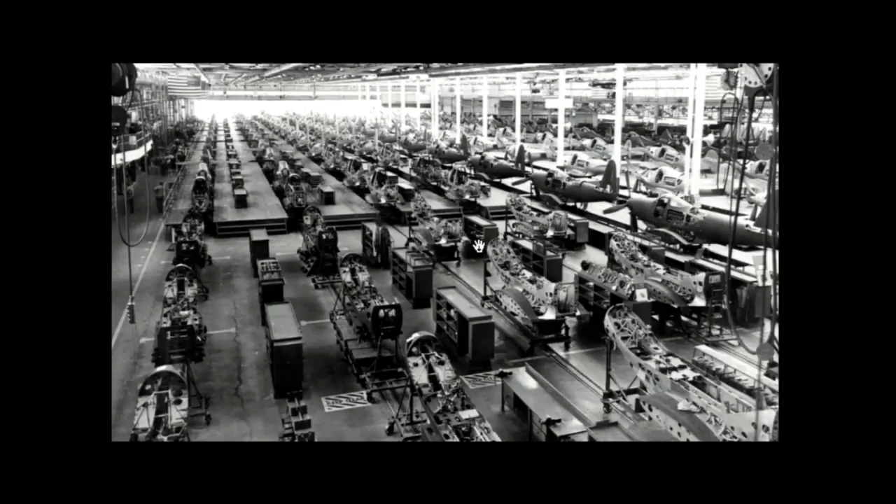I'm clearly behind on the slides. I feel like Britney Spears with this thing on.

So basically behind the scenes of these everyday abundances, the Coca-Colas that we enjoy - it's not Coca-Cola actually, it's something much more healthy - is this system, this industrial machine that created this extraordinary abundance and this idea of the good life.

And what's happening in our generation is that that's failing in a lot of different areas, but particularly within the domain of housing. The idea that you can put aside some money and afford a home is not working, even in very wealthy developed economies, and that's really, really interesting.

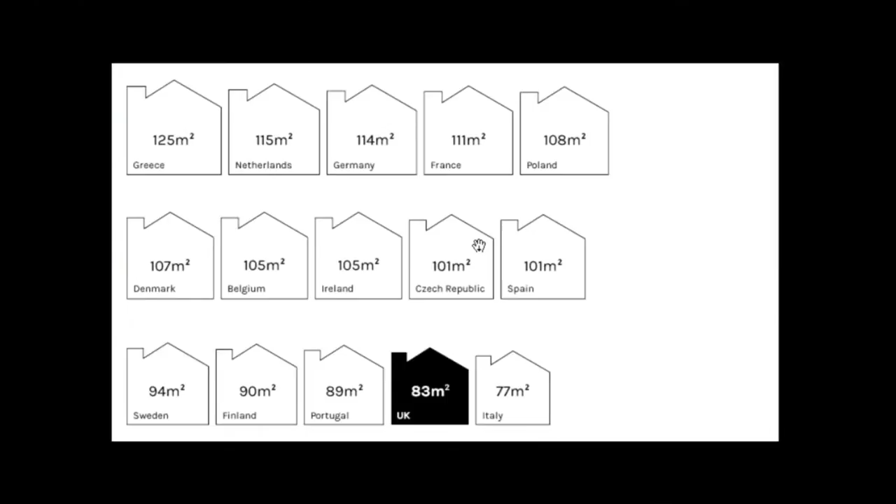So certainly you guys are not doing so well either. This is the UK building the second smallest houses in Europe, Sweden. This was actually the peak of the boom.

Sweden, not far off either. Why is it that wealthy countries are building tiny box houses? Something to do with the economics of what's going on here.

That also means when you have this inflation, you get into a self-perpetuating loop because you don't have market competition on quality, you don't have people with any power, and you have this essentially a democratic legitimacy crisis. You have a constrained supply of land, you have price inflation, you get low competition on quality, so you get poor quality homes that disenfranchise people, so there's public resistance to new development on new land, and that in turn locks the planning system. So you end up in this Gordian knot, this vicious downward cycle of housing crisis.

So behind it all is a question. There's so much misinformation in the housing thing. Behind it all is this question that doesn't get asked enough, which is: who actually builds them? Who are we working for when architects are designing houses?

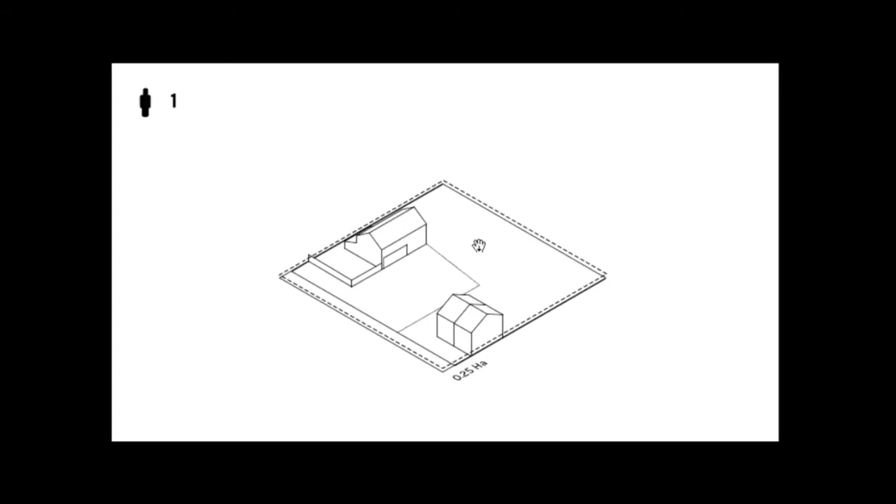And that model is one of the things we take for granted. I apologize here because we're going to have to start unpacking the obvious, because it's so obvious that no one's been talking about how this actually works, which is, fundamentally, since the Industrial Revolution, our housing models have not changed.

Why we were doing them has changed. So it began as housing for the poor, then it began as housing for the workers, then it became housing for the people in the welfare state, now it's housing for the borrowers.

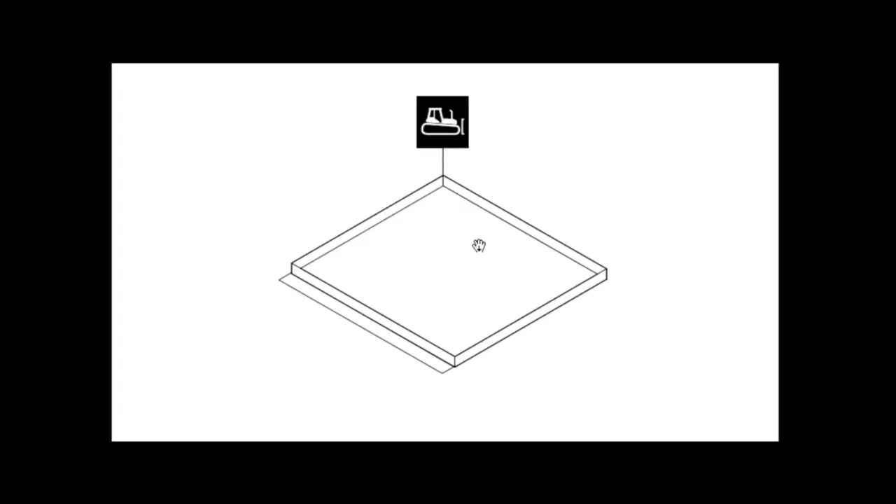But the fundamental idea, the model, hasn't changed, which is you take a piece of land and the first thing you do is you clear it. Politically, physically, you clear that land. And this, obviously, if you go to Cape Town and look at District 6, apartheid South Africa has very political overtones, but it always has political overtones. And then you get one single developer who bought the land, and they hire one architect and one contractor, and they get them to do this design.

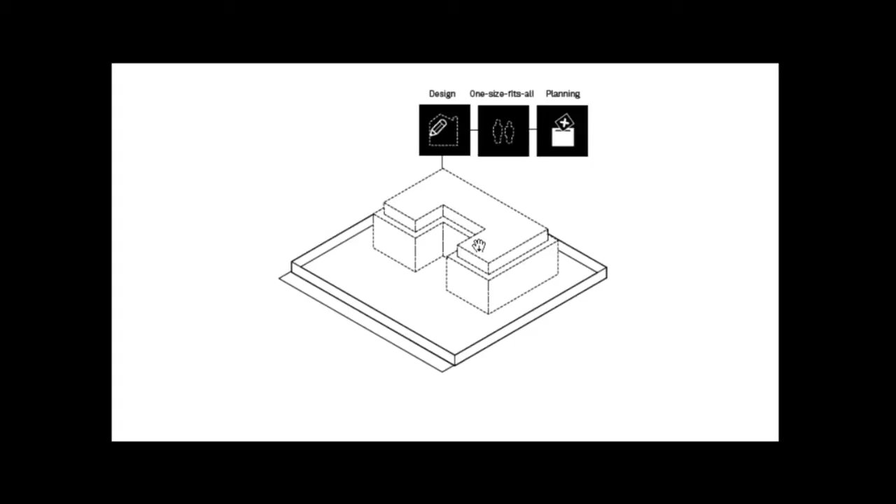And of course, form follows finance is the actual rule of architecture. And so what you end up with is this single monolithic chunk of capital turning into a single monolithic building. And that's why many of our buildings look the way they do.

Not because it's the best way that we decided to live in the future, it's because actually it's the most efficient way of building if you're from the supply side.

And even more deep within the things we take for granted is the weirdness of this, which is that it's not designed for people. Like, if you ask a child, how do you think we build houses in our society? They say, well, probably someone needs a house and they go and get one. That's not how it works.

You get this architect, this company hires an architect to imagine this imaginary average person, and they design this imaginary average box. And again, this is ingrained. This is what architects were taught for like a century, that this is how you design housing.

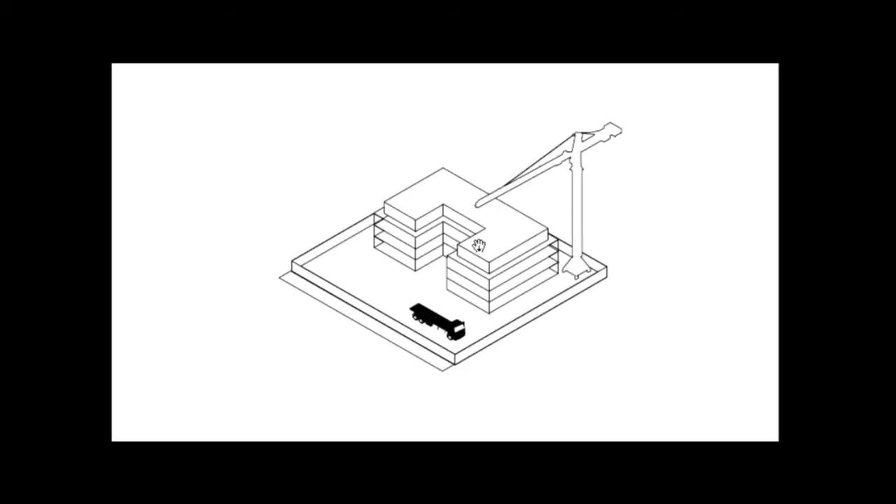Very, very weird. And of course, what you then do is you apply for planning applications to governments, public institutions who are largely dependent on private developers to provide any kind of affordable housing. So you have to get someone to produce a load of drawings, and then you send it off to a human, because our planning systems were designed before computers or the internet.

Now the problem with this is it's a highly corruptible system, because if you catch that person, that human, on a good day, they'll say yes. If you catch them on a bad day, they'll say no. If they like the colour blue, they'll say yes. If they don't, they'll say no. If they happen to politically need a particular kind of outcome, it affects the decision. So it's a highly corruptible system, not necessarily in the brown envelope sense, but in the more tacit sense.

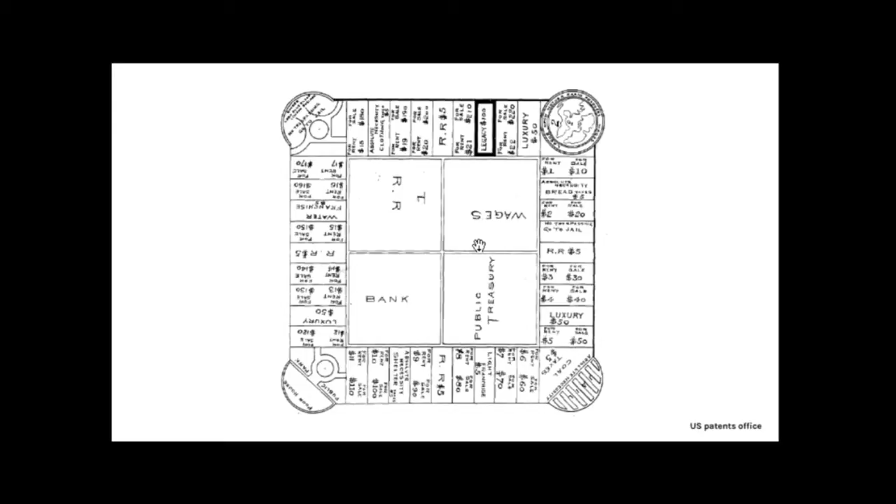And then, of course, you get your massive chunk of financial capital, and entirely through the monetary economy, you procure this building and construct it. Now, the open secret behind this, and the thing that, again, as a profession, architecture has been blind to for a long time, is that we are not designing houses. We're designing financial real estate properties. Does anyone know what this is?

Correct. Yeah, this is the original Monopoly board from the US Patent Office. It was originally designed, ironically, as a cautionary tale, to explain how stupid it would be if you allowed monopoly real estate to dominate the housing sector. And it massively backfired, because instead of taking the actual lesson, which is that three out of four people lose, we took the one lesson: hey, it might be me that wins. And that's exactly what happened in real life as well.

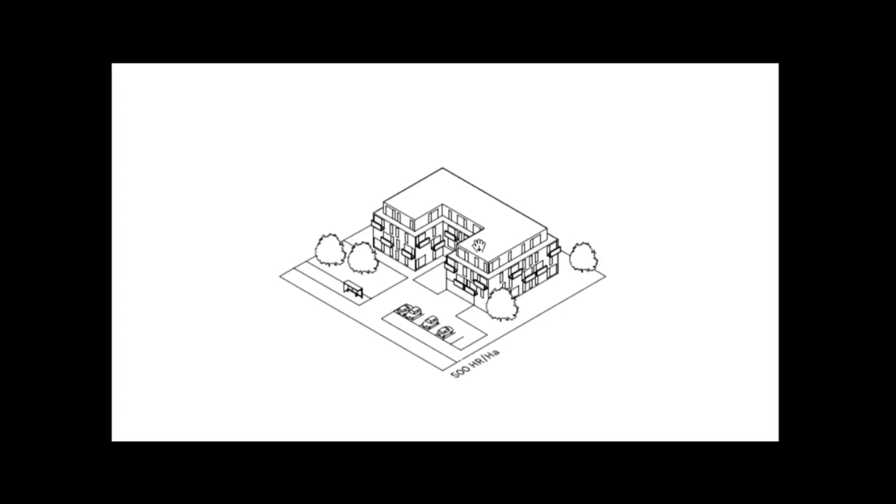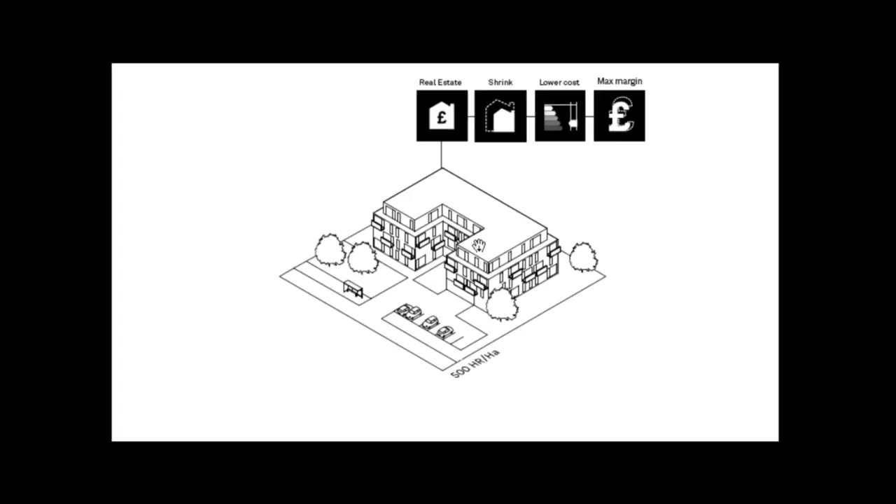And of course, what you end up with is this. Because it's designed as a financial asset, a piece of real estate, the developer, in an inflating economy, has no competition on quality. So what they do is create an industry with a really good incentive to reduce what is meant by home.

So of course they shrink the houses, they take the balconies off, they make the ceilings low. If you're an architect who's worked in practice, you'll be familiar with these frustrations with your client who comes along and says, yeah, I want you to make it a little bit crapper.

This is what got me started, by the way, in 2006 when I was working - it was really fantastic times, but everybody was talking about this stuff. I was like, this is interesting, because there's something weird in the economics going on.

It's also a massive problem, because every government in the world right now has a policy to make more sustainable housing, but developers see everything that we see as good about housing as costs. Quality, sustainability, affordability - everything we see as good about a house is just a cost to them, because their job is to service their shareholders.

Now, that does not make them bad people. They're perfectly good people, doing their job. Most of what we call bad design is not bad design - it's very good design for a totally different economic outcome than the one we think we're working on. And it's because, as architects, we've been naive to the economics of our own industry that we didn't spot this sooner.

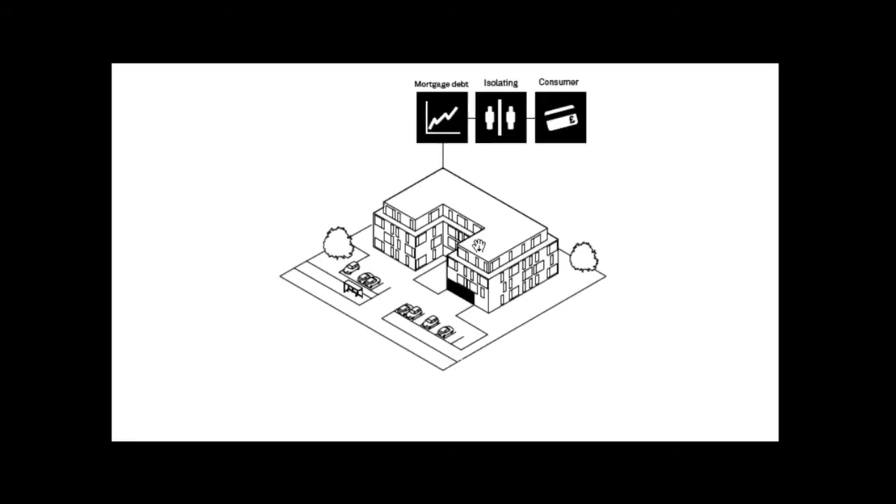And of course, the neighborhood you end up with isn't a real neighborhood. It's this kind of planned dead body of a neighborhood that people just move into. I think of them as hotels for people with mortgages - permanent hotels. They're not places where you want to bring up kids, put down roots, or start a business. They're just like hotel rooms you hire, and you have a concierge sometimes if you're in one of the really expensive buildings, and some even have swimming pools.

So it's basically a big stack of mortgage debt which we happen to live in. They're socially isolating, there's no community ties, and they're effectively consumer neighborhoods. There's no productivity in these.

Now, if you think that diagram is us being cartoonish, that's literally what we're building. This is not communist Russia in the 1930s - this is East London a few years ago. We're literally building that diagram and calling it a city. Occasionally what you do is hire an architect to come along and jiggle up the facades a bit, to pretend that it's not what it is.

So this is London, this is the UK. Looks different, but fundamentally it's the same animal - just turning out these one-size little boxes and then moving people in and giving them a mortgage.

And that's where that model had its roots: Levittown in the USA in the 50s. This is what built the good life - this was the Coca-Cola model of housing. At the peak of its production, this Fordist approach to housing could turn out something like one home every hour - an extraordinary feat of mass production. They built whole towns, Levittown, still called that today. And you can go almost anywhere in the world and find that this is basically the model we're still using.

At this point I will switch out to this video here, which again should be all smooth and seamless, but it's not. So this is one example of this prototype. Now this is not just something that happens here.

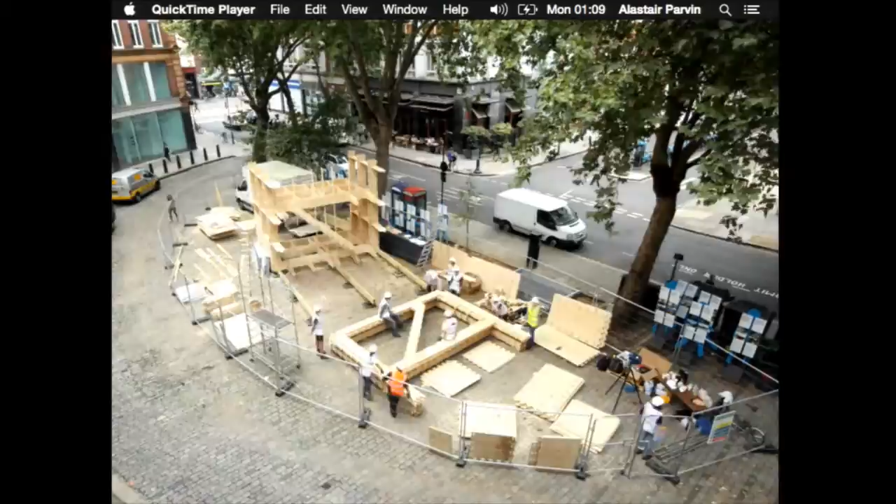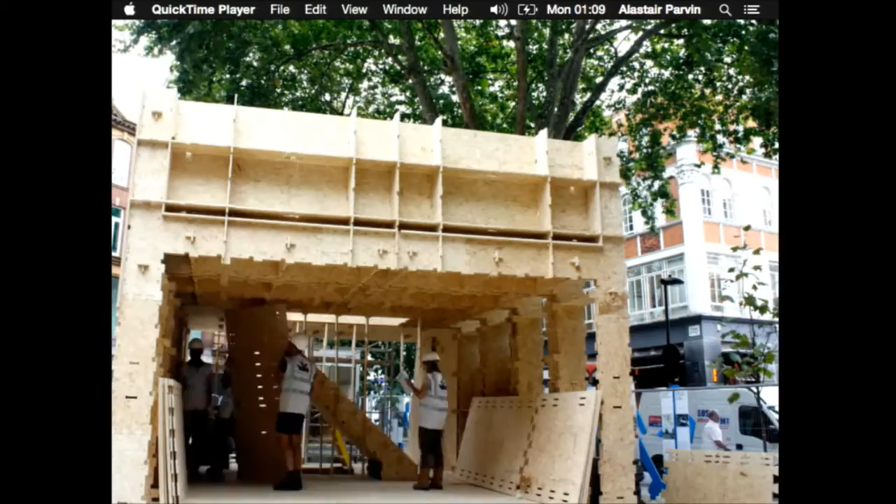Locked into these joints is something very, very interesting. The idea of this sort of grammar of vernacular joints is literally, some of them, stolen from 14th century timber connections. So it's this language of grammar, but locked into that is essentially lowering the thresholds of time, cost, and complexity. There's this wonderful design concept called poka-yoke, I think, which is foolproofing it, so it makes it impossible to get a piece wrong or put in the wrong way around.

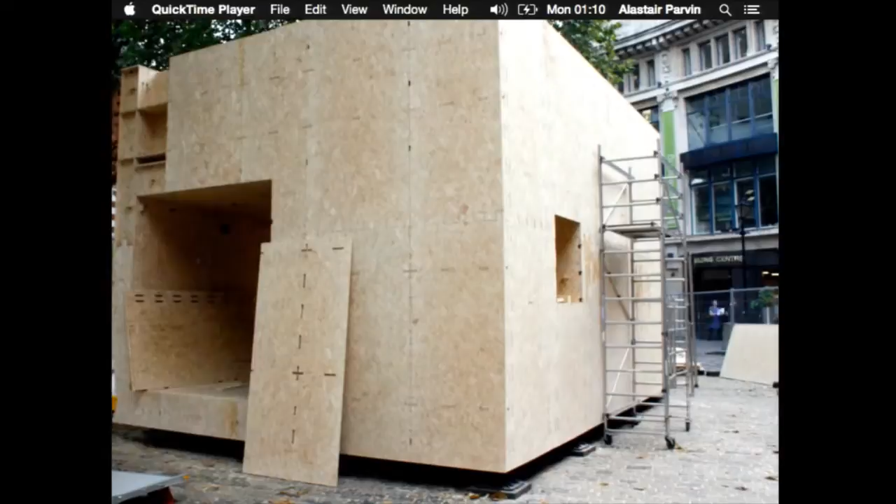So all the time, essentially, you're designing this kit system so that it's incredibly hard to get it wrong, incredibly safe to build. It looks like sort of just fun, playing with Lego, but actually there's a lot of really interesting hard-nosed legal elements to this in terms of how you make it safe to build, how you make it certifiable even when built by amateurs, etc.

But the fundamental point is that it's a building system that makes it very, very simple for a team of amateurs to build something very fast.

So this house here was just a prototype house that we did last September in London. It was actually a two-story house with the lid missing, it wasn't just a box. We built that and measured it at the end, got the tape measure out, and the difference between the house and the computer model of the house was 5 millimeters.

That's our kind of boasting point, but it's actually really interesting, because normally to get that kind of construction precision, you have to go to some insanely expensive German company. But this was built by amateurs. And that's powerful, because a huge amount of the barriers and the skill is things going wrong and not knowing how to overcome them. So when things just click together, it means effectively you can do it yourself with your friends.

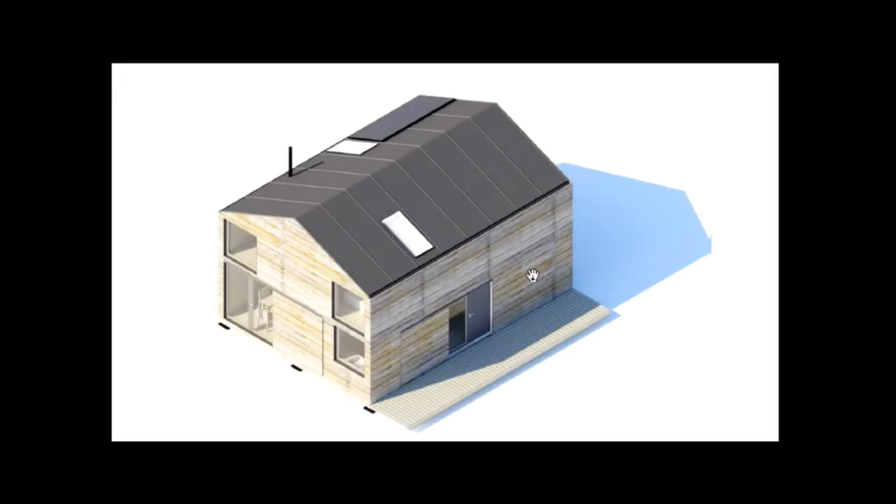Again, this would be an animation, but it's obviously not going to happen. So this is actually a house we're going to be building this summer using that system, and we've developed this chassis system. Onto that, you then build out very quickly into your full house, so you can plug in all the parts that are interoperable.

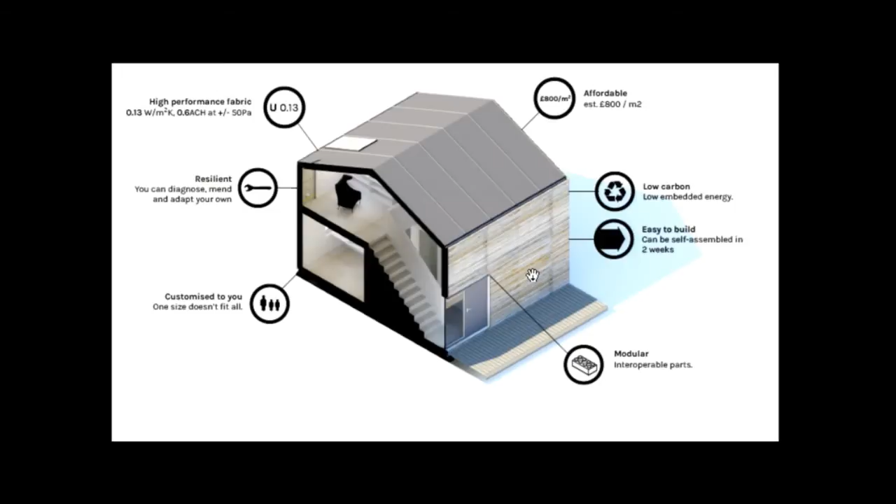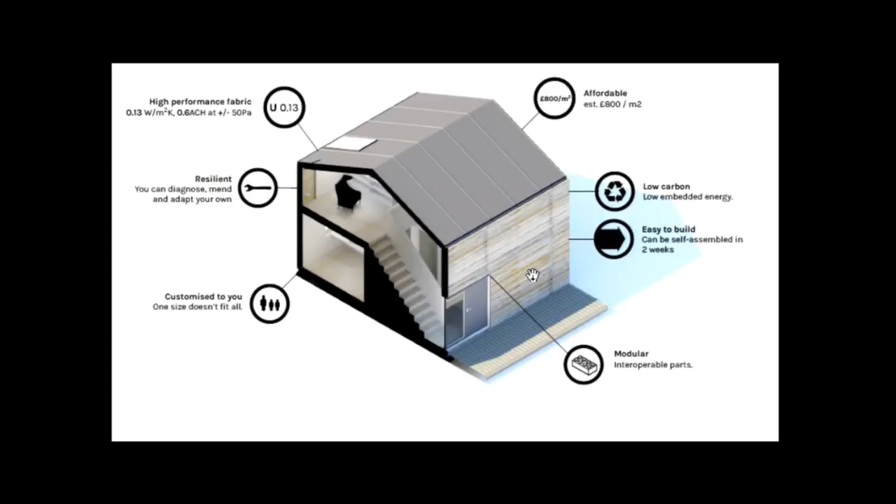This is just one of these boasty pages about, oh, isn't it brilliant? The key message is that these are not sort of slightly flimsy timber houses. These are fundamentally passive house levels of performance, really robust homes, high levels of airtightness. The key thing is that it's also interoperable and modular, so you can get in, replace parts and maintain parts over the building's life. A whole load of things about buildings that should have always been the case, but we never had time to build into the system.

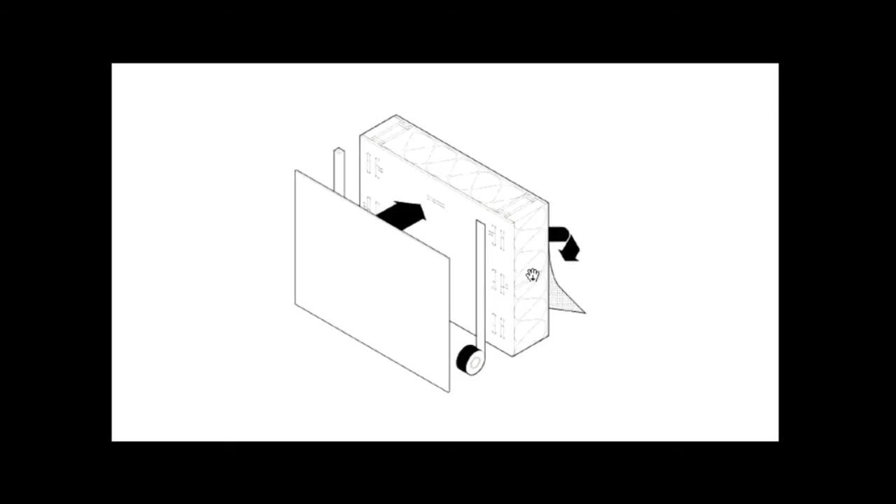And what that gets you is this chassis, which you then build up, and we're trying to follow through in terms of making it incredibly simple to build out and complete that house. The ultimate ambition of the WikiHouse project is to make an open source common building system, which is a full stack building system.

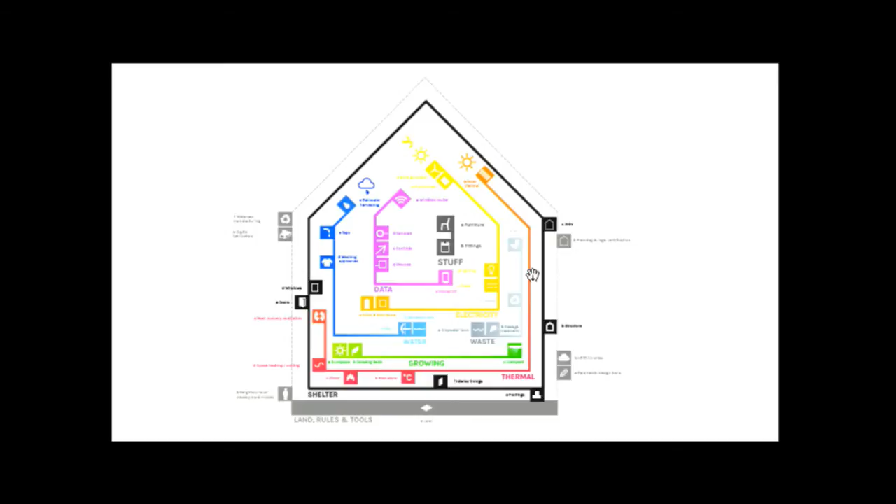Where many companies come together and contribute open source projects that are based on open standards and interoperable. So not just the problem of structure and envelope, which is where we've been working primarily to kickstart the project, but open source interoperable solutions, other things like plug and play services that you can just click together, again, like Lego.

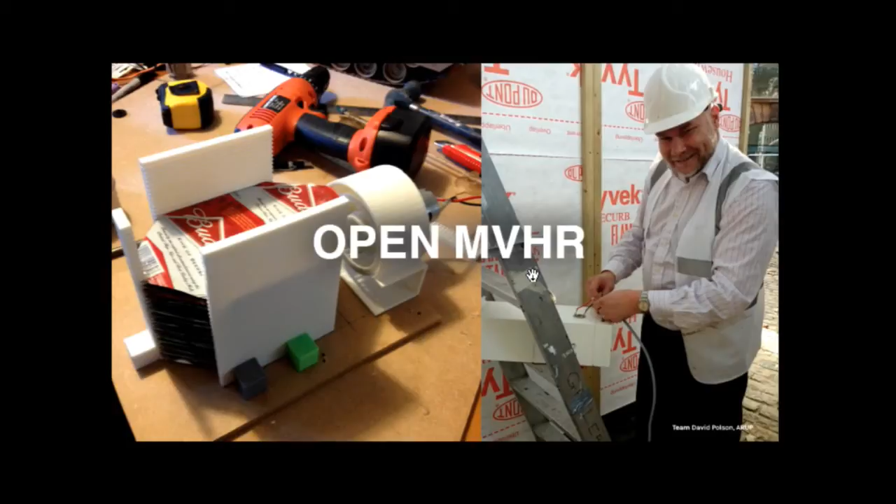This is a really amazing project by a guy called David Polson. We collaborated with Arups on this, and he works for Arups, and he did this amazing project. This is a mechanical heat recovery ventilator. It takes the waste air from the house and recovers 70% of the energy that would otherwise be lost in the air being expelled.

It's made from three elements: 3D printed plastic parts, a motor from a kid's toy, and recycled beer cans. Even the first prototype was matching the performance of the existing industry product. It costs about £24 to make. The existing industry product costs about £200 to buy.

Really, really interesting innovation that would not work, or would still be just as expensive, if you tried to produce it through a centralized manufacturing model. So I'm going to skip through this. These are all just our boasty pages that we have to use.

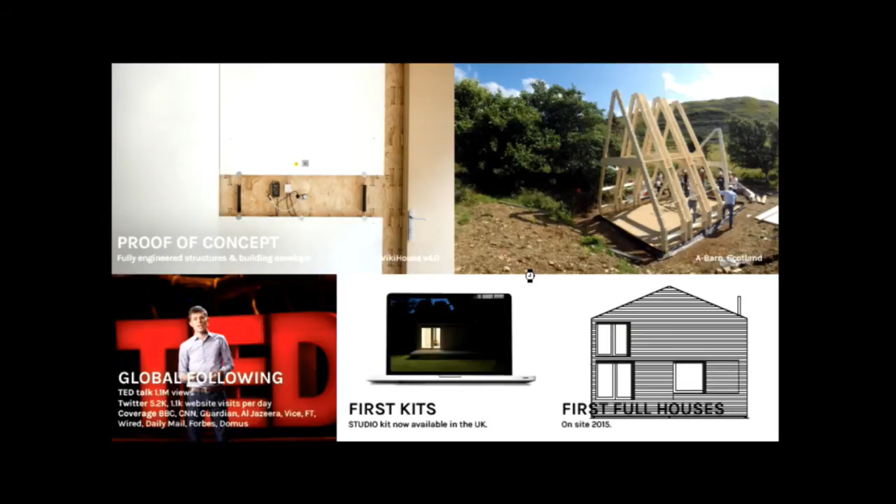And of course, the key thing about this is it all belongs to you. So everything that we're developing is completely open source. Obviously, our initial community is enthusiastic, passionate designers, students, early manufacturers. It's beginning to get to the point now where we're moving towards commercialization, but that's cool.

So we now have, actually this is out of date, we have 20 chapters, I think, in various places around the world. And so when we're thinking about this, we're not just thinking about the technology, but we're also thinking about the new forms of organization that come with those technologies.

So we have established, at the center of this system, an organization called the WikiHouse Foundation, which is a non-profit organization aimed to be a kind of custodian and build the digital platform for the community, or rather allow the community to come together to collaboratively build the digital platform.

Now that is in a way kind of mental, because we're in a tech world where everyone believes that the only way to build serious big digital infrastructure, like peer-to-peer infrastructure such as eBay and Airbnb, is to do it through a sort of venture capital model.

So what we're currently trying to do is get enough partners together who see value in this, big companies, small companies, whoever, and say yes, invest to help us build this, but don't invest to own an equity stake in it so that you can just become a rentier kind of owner of it, but rather invest so that you then get to use the system and derive all the potential benefits of it.

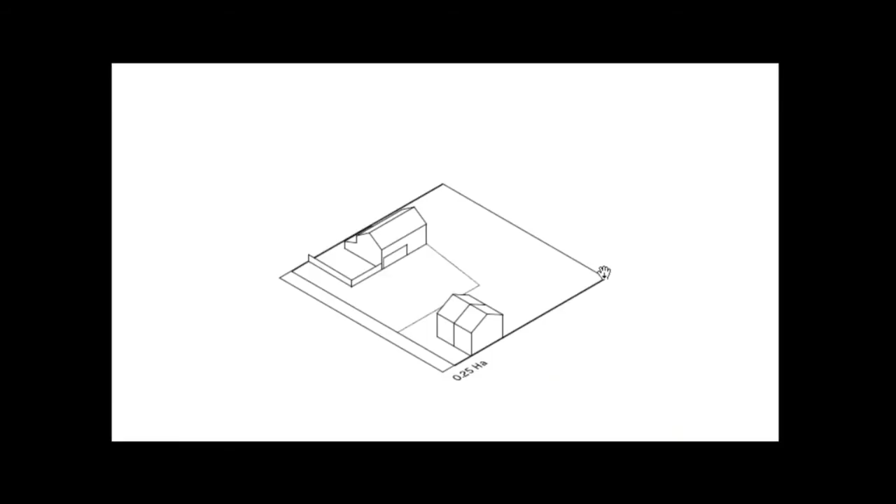So some of them are unique one-off projects. Some of them are sort of replicable products like this that can be customized, et cetera, et cetera. And hopefully there'll be some of those happening in Sweden at some point, and someone will lead the way.

So the really interesting thing is, given this potential third industrial revolution, suddenly we can use these technologies to address the too damn difficult problem. We can question that fundamental assumption we took for granted, that we are dependent on top-down housing providers to solve our housing crisis. So what could that mean for the way that we develop neighborhoods, and what would that mean politically?

So we take the same plot of land, it's worth the same amount of money, but instead of selling it to one person with a huge chunk of capital, we sell it to many people with a small amount of capital each, and we divide it up into plots.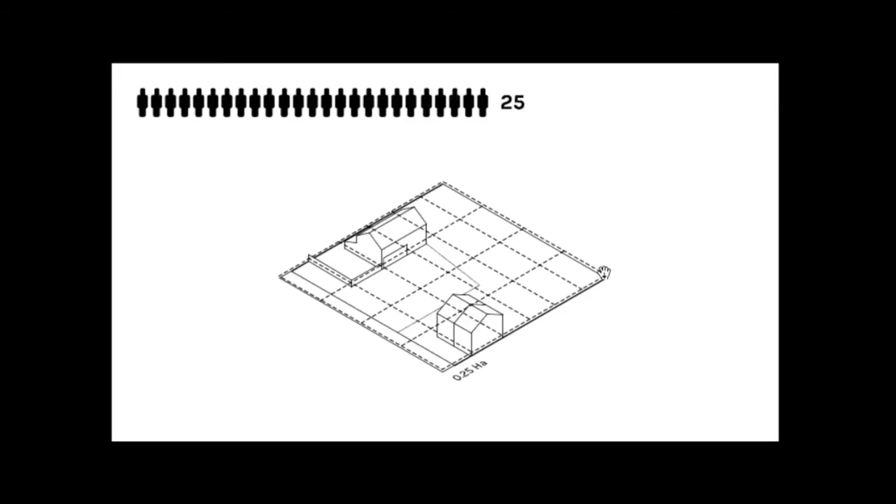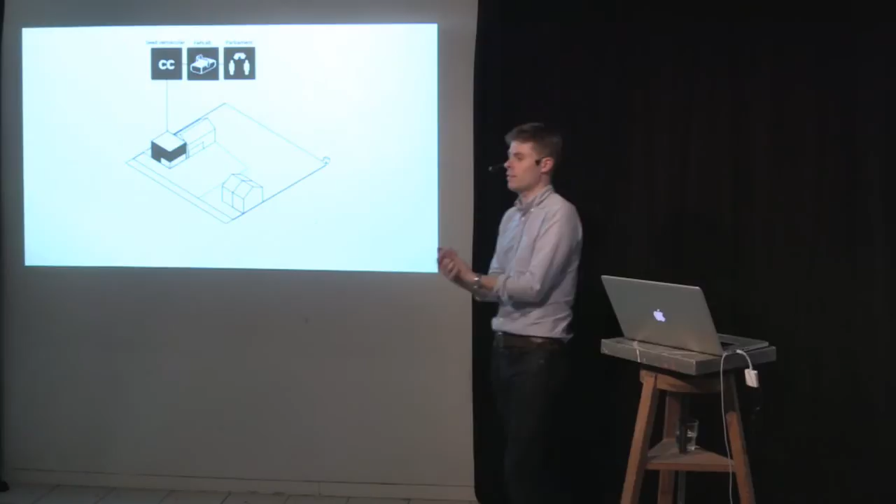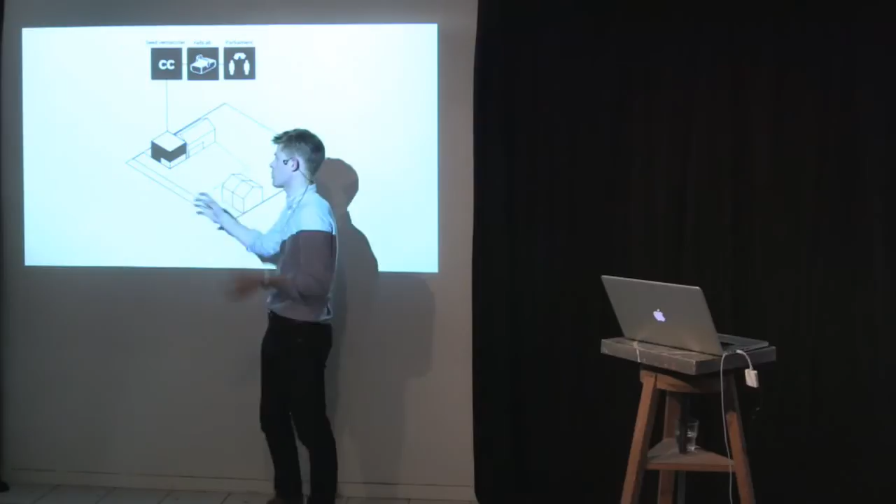And maybe the first thing we would do is create a community factory, a sort of seed prototype building, which is also something potentially to copy, but it also has a machine there, and it's a kind of community parliament where all existing and future residents can meet and debate, getting rid of the insider-outsider problem, but also the top-down, bottom-up problem, because here you can have a mediated environment, not just in virtual space but in physical space, where local authorities, mayors, and companies can connect with individuals. So that's quite important.

By the way, sometimes you just call this a fab lab. And this is the amazing power of fab labs, is that they potentially serve that role.

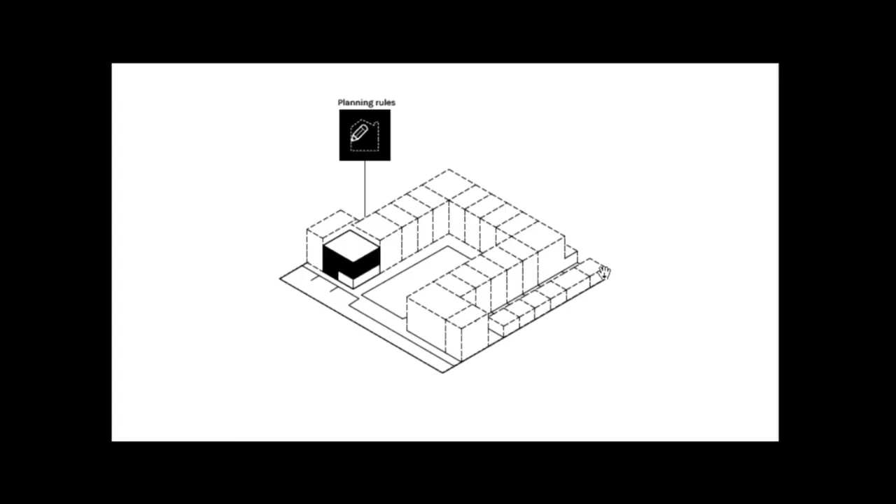So we've got to fundamentally change our approach. Now we have these things called general permitted developments, but now we have the web, computers, parametric rules-based tools, so there's no reason we can't make it incredibly simple for the community, perhaps voting, perhaps working together, to work with the local authority to develop a basic set of neighborhood rules. The rules can be pretty much anything you want, but once set, as long as you stay within them, you're free to develop however you like.

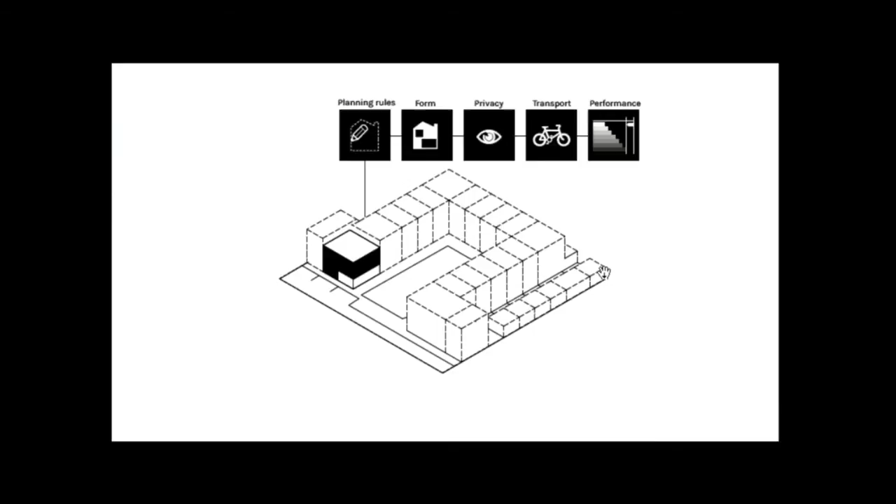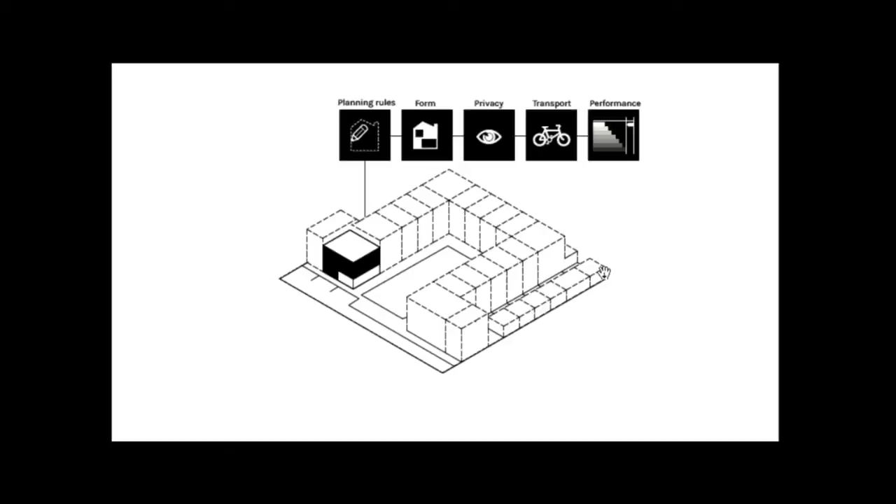This is actually super powerful from a democratic legitimacy point of view, because you're moving the planning system upstream of the market, not downstream of the market. So instead of our current system where the market says, I want to do this, and I'm the only option, say yes or no, we flip it: we have a civic discourse first about the way we want to design, and then we let the market do its work and find the best way it could do it.

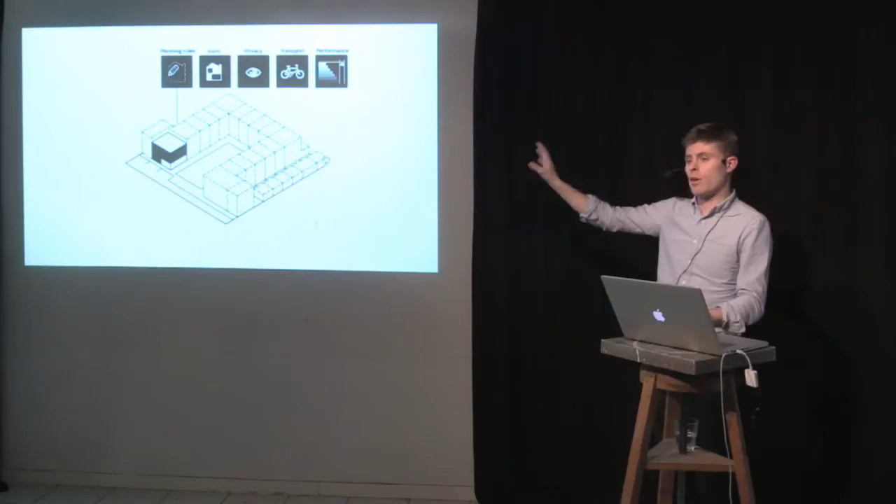So we move, by the way, a lot of the legislation to do that already exists. It doesn't need creating, we're just not using it.

And then you need an initial capital from plot sales, perhaps, to install the basic infrastructure and plots. And then people can build.

And we're not suggesting they only use the WikiHouse system, because what we need is an industry where we're not dependent on just 4 companies, not just 10, not dependent at all. We've got free, proper competition of companies who want to work for you to service your aim to get the best, most sustainable homes possible. So just by separating the land from the house economically, you create a proper competitive market of companies wanting to help you do this.

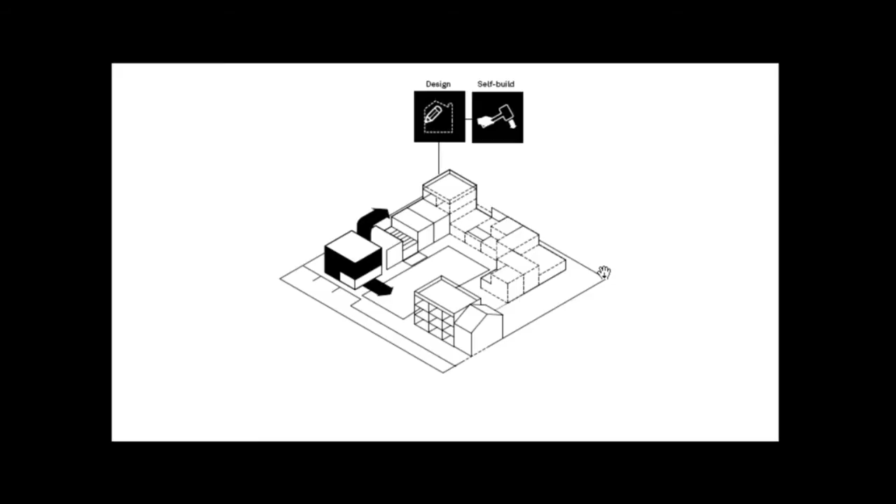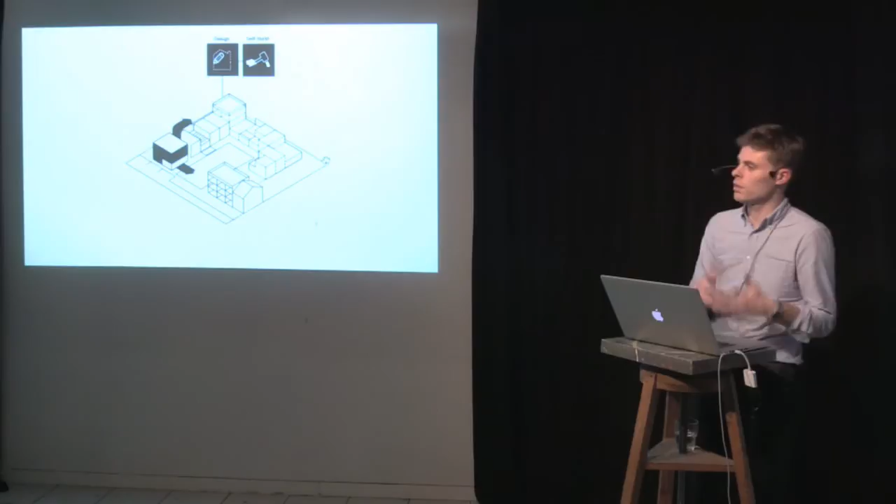So some people will go the whole hog and build the whole house themselves. Some people will just buy it off the hook from a company, like Muji do in Japan, and I'm sure IKEA and B&Q could definitely be in that range of possibility. But most people will do things in the middle, where they'll do some of the work themselves and hire others for the rest.

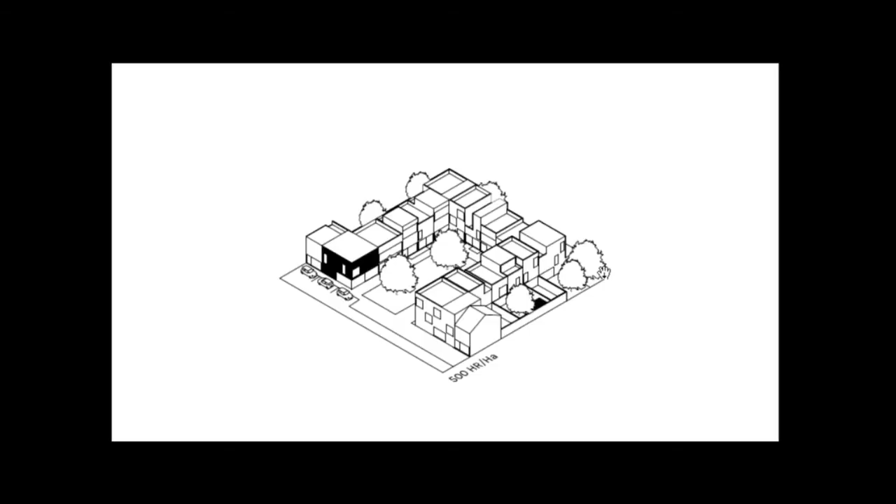So what you're actually doing here is combining not just top-down financial capital, but also bottom-up social capital. That means, bluntly, you're not just talking about affordable housing, your houses actually get cheaper, because you can do some of the work yourself. It also has a load of sideways benefits. There's a thing in psychology called the IKEA effect, basically that people love things more that they built themselves. So you're getting a whole load of social benefits, because the process of making the neighborhood is also making a community, unlike the current model where your neighbor is just whoever happens to buy the mortgage next door.

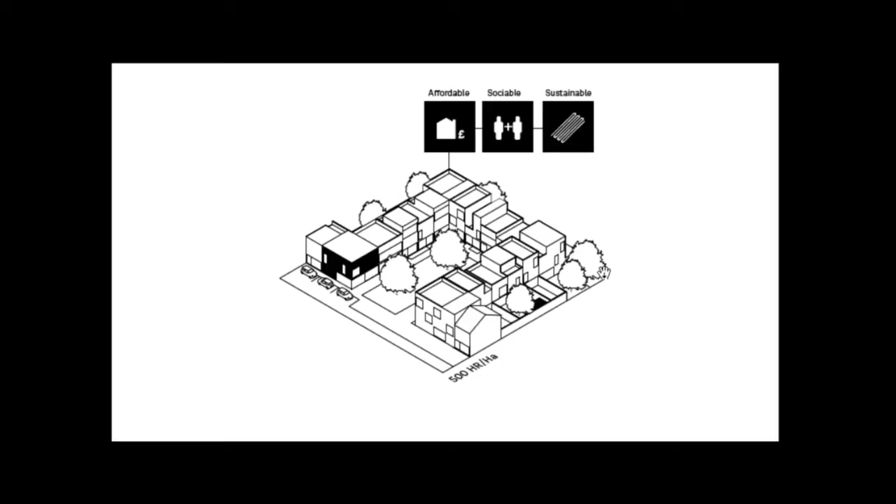So we're getting actual neighborhoods which were designed and invested in as places to live. They're actually affordable. You actually know who your neighbors are. You actually have social ties. And of course, they were built by the people who are going to pay the heating bill. So we can start to move towards radically resilient, sustainable things. We have the technologies to do this, but we're not deploying them because we're trying to build housing through the wrong market that doesn't value them.

And also that community factory then becomes a long-term community asset, potentially a learning platform, perhaps just a village hall. Like we used to build village halls. We don't do that anymore. We just build supermarkets now. But actually, we will see a return to this idea of local, basic, community-level education and economic infrastructure, places to start a business. And again, that's what the Fab Lab movement is at the very front edge of.

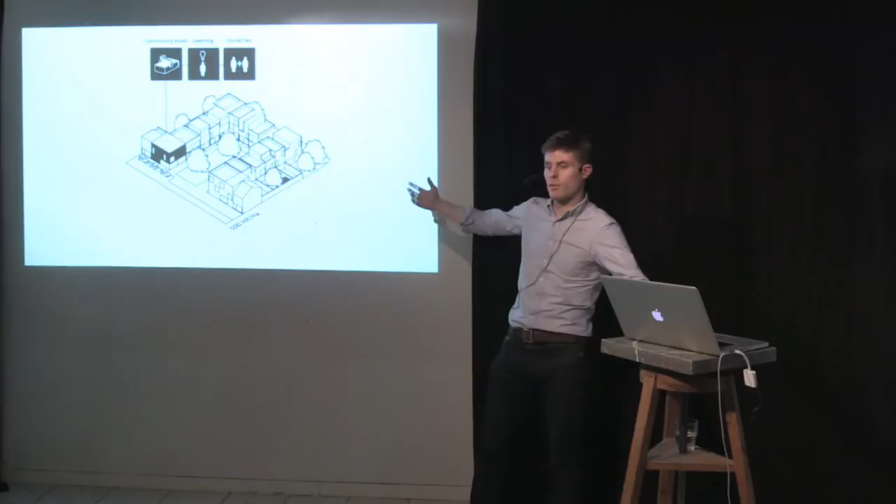So what does that mean? The basic headline narrative, if you like, that we take back for governments who are saying, what do we do about housing, is to say, we are not going to be able to unlock this knot using the same old top-down housing systems. Because also, by the way, what I didn't say on that is this is also addressing that problem of democratic legitimacy. Because if you go to the local people and say, hey, would you like new housing which is made by this company top-down, or would you like the opportunity to buy a plot and make your own housing, suddenly you'll find the support for new development goes through the roof.

It really annoys me when I hear people talk about these big infrastructural challenges, and they say, oh, why can't we be more like China and just temporarily push this democracy thing into the back seat for a while? No, the answer, the solution is more democracy, not less.

I have a total sympathy with NIMBYs, people who are resisting new development, because actually they're being asked to bear all the costs of new development and they get none of the benefits. Well, actually, if you make an economic system in which they get the benefits, they'll, of course, be much more in favor of it. So in the UK, at least, I'm sure you guys have an equivalent, we have a target, which is how many houses we think we actually need to meet demand. It's pretty much agreed by everyone in industry that the existing industries cannot do it.

So our big takeaway idea for the architecture industry and for architects, going beyond the walls of their own paycheck to actually redesign the systems and economics behind architecture, taking that out to businesses and particularly to government, there is one big idea that we're trying to peddle, which is the central mission needs to be to build a new housing sector in the 21st century. And the housing sector is called the citizen sector. And everything we do should be focused on how can we scale that up?

What prevents that scaling up? And that includes, yes, these common infrastructural technologies like WikiHouse, but it also includes new forms of finance, like community-level finance. It also includes new forms of planning rule. And one of the planning rules that I've been arguing for is instead of sticking to this old-fashioned idea of state versus market, the key distinction we actually need to make is between homes as a place to live and homes as a financial asset.